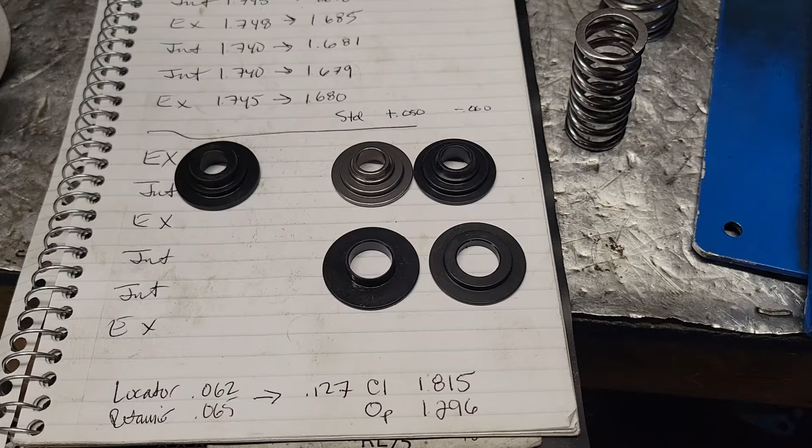Alright, so here we are playing with some valve springs, and let me give you some more tech info here.

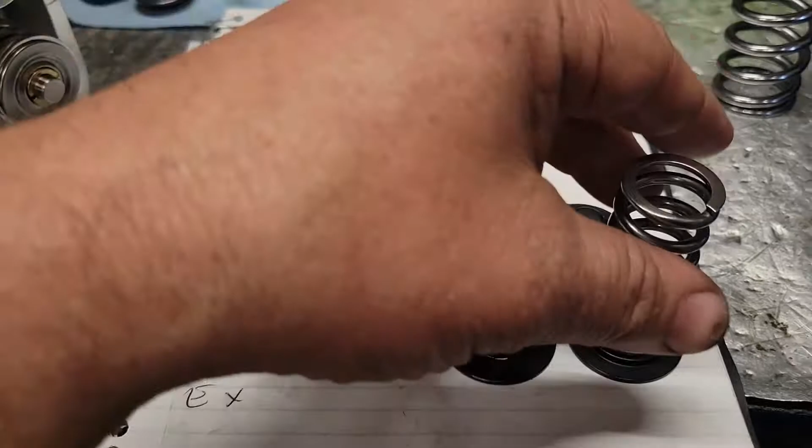See, we have the locators. That's a standard locator with no step. Here's a step locator. When you have dual springs, you get a little bit more pressure out of there.

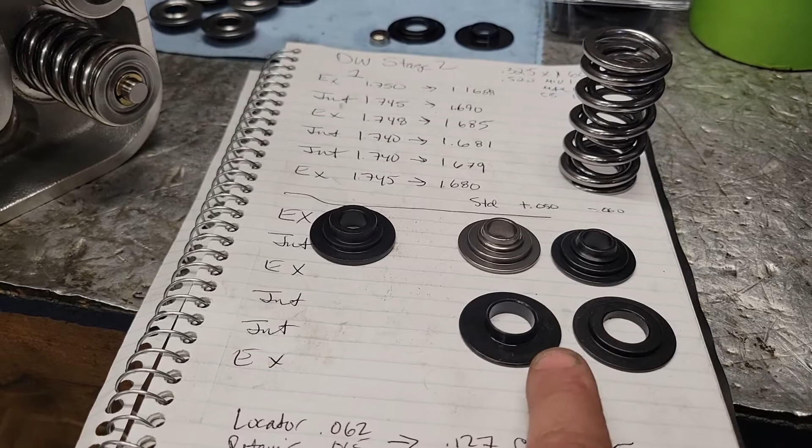And then all of our retainers have a step. Okay, so when you're measuring your valve spring, you actually want to put the entire spring on the locator and the retainer, and then stick it in your spring compressor. So what you want to do is measure the thickness of the outermost edge, which is 62, and the retainer is 65, and the locator is 62. That's the combination I have right here on this head.

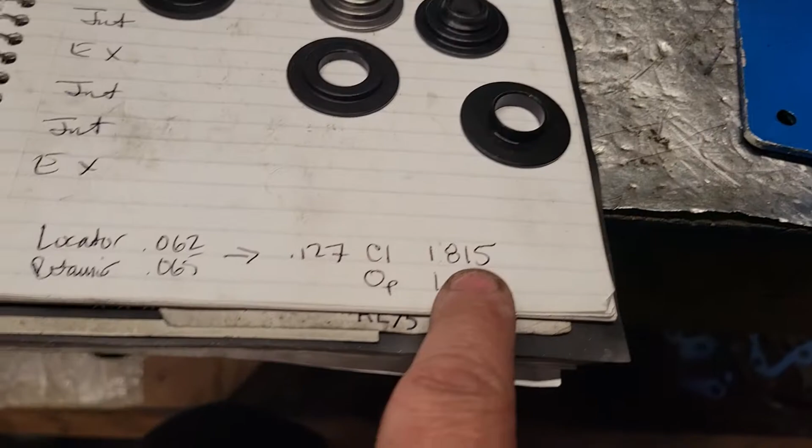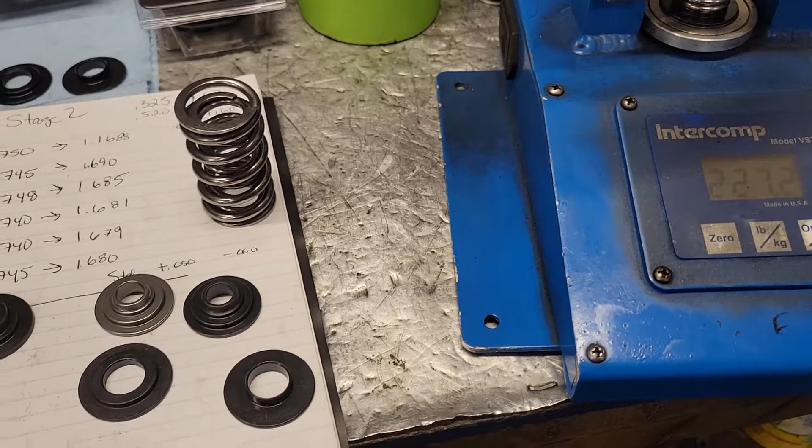And then you put them on the compressor and you do backwards math. You add 127 to your closed and your open, so it goes from 1688 to 1815, and then I'm just going to go max open, which is 1.169, add it to that, so that's 1.296. Check my math, hopefully I'm right. I'll check it again once I'm done doing the video.

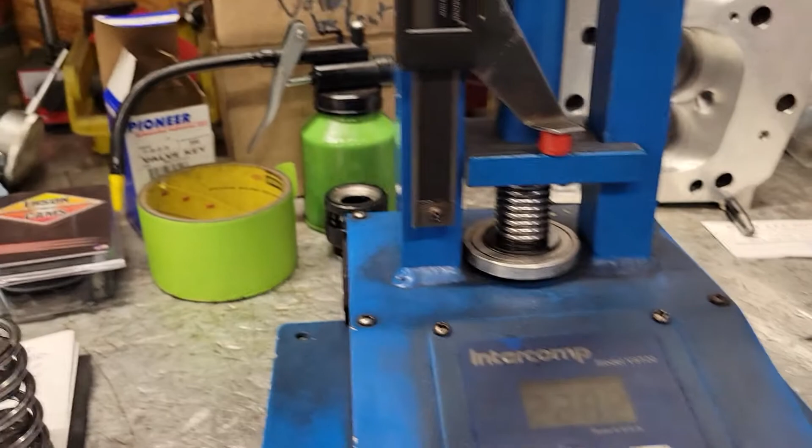And I ran into coil bind on the inner spring, and of course it's sleeping now, so let me wake it up. There it is, it's awake. Let's see where it binds.

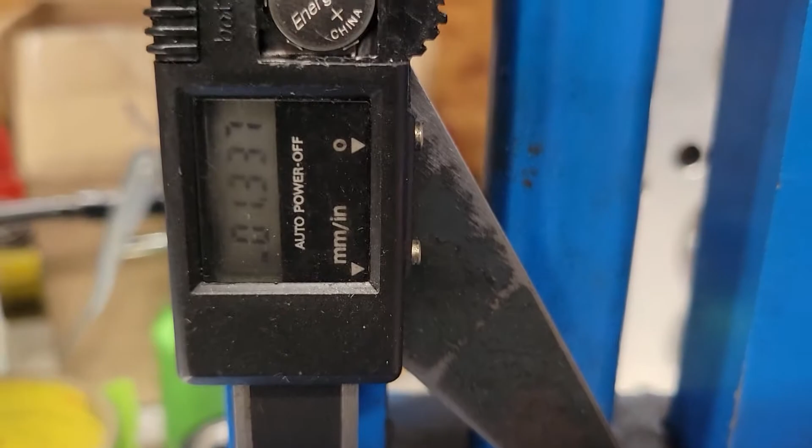It binds at 1377. I have to go to 1296, and you can see that's 150 pounds of pressure. So let me show you that it's in bind. That's in bind. That's it.

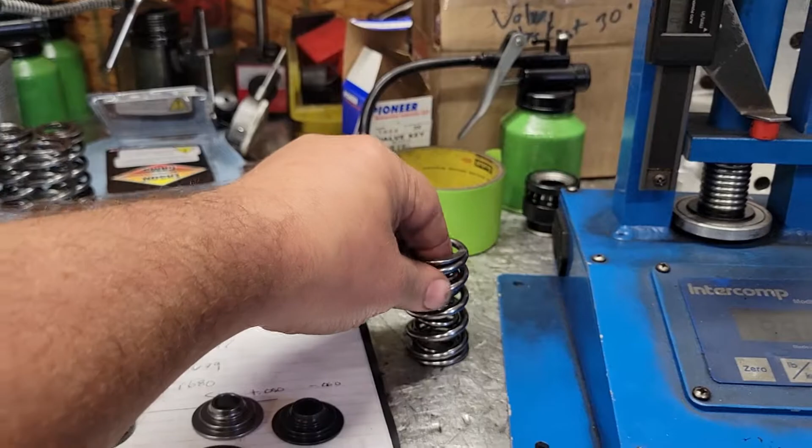So of course it should be installed before bind. So now this number's no good. So if I didn't account for this inner spring and I just played with the outer spring and measured it without the retainers on it, all these guys would be set up at coil bind on the inside spring.

It might not coil bind because you lose it in the rockers and you lose it in the push rod because there's deflection. But you can't build a performance engine on that. You mathematically have to have a safety net built in. How are we going to do that? We're going to change one of these components.

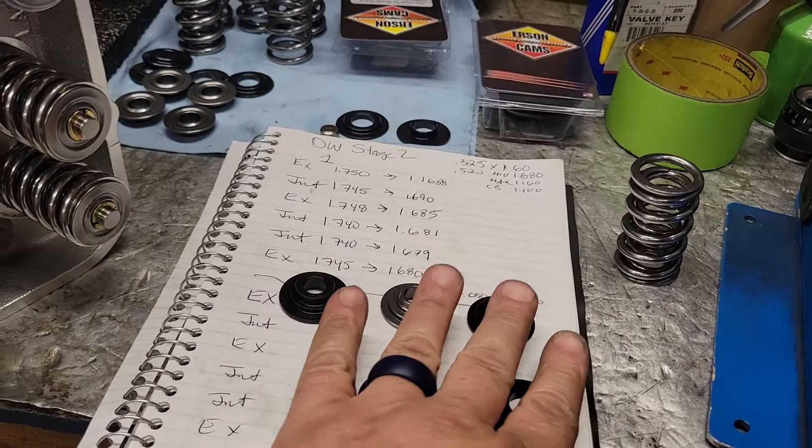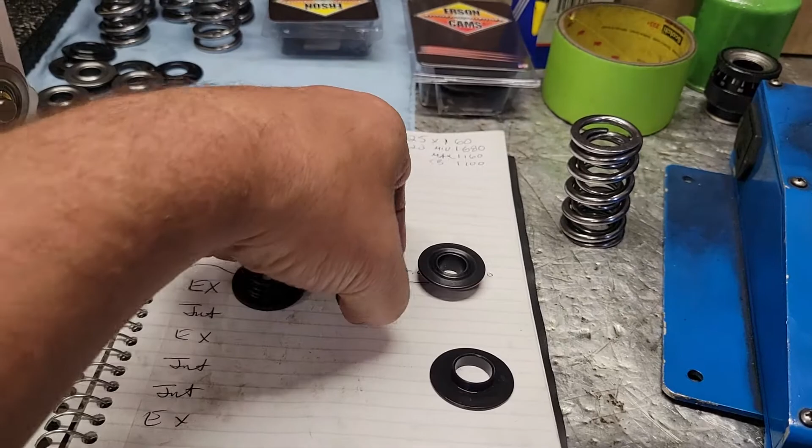So we're going to take this one out of the equation. It has a step, and we're going to use the one without the step. And then I can use this one, or this one, or this one. Well, these are black and one of those is silver. What's the difference? Well, these are steel and these are tool steel.

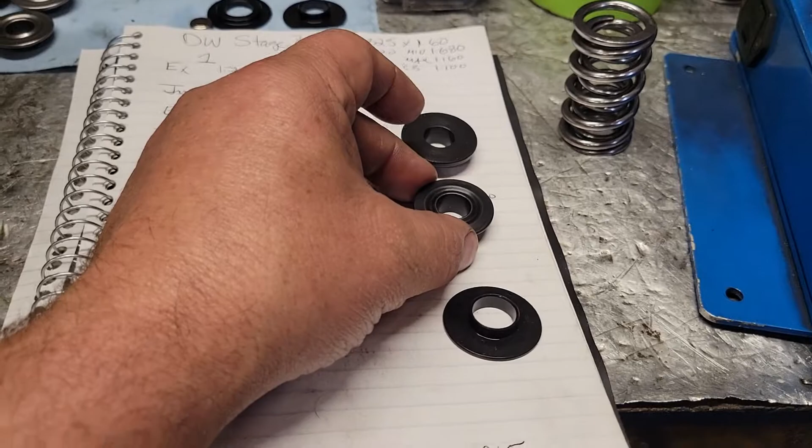So these are really light, and let's walk over to the scale and we'll see how light they are.

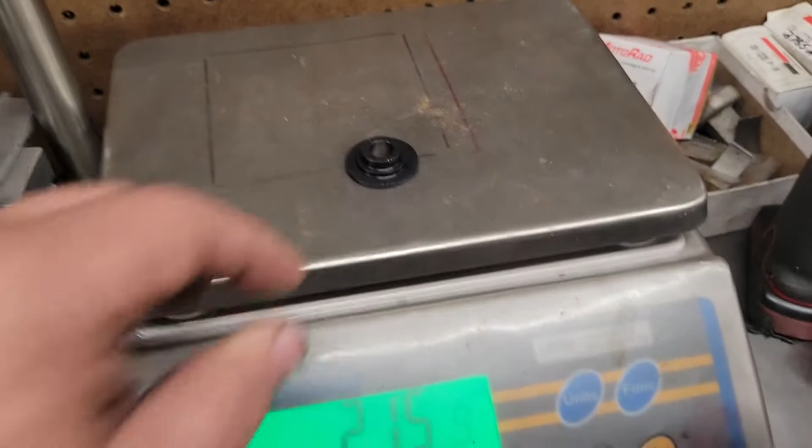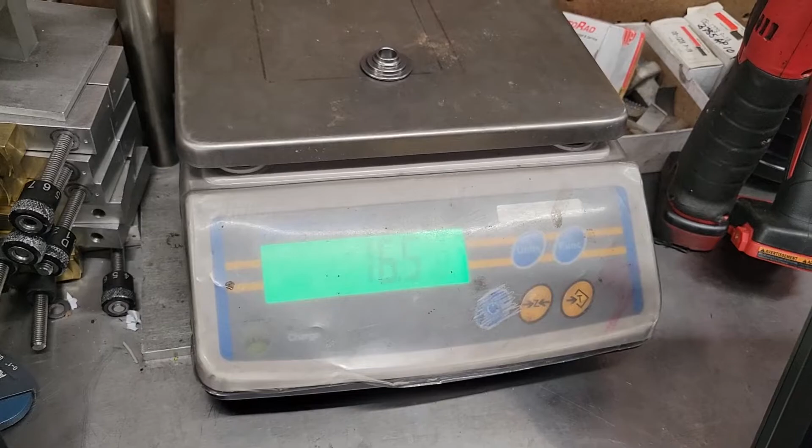Right, so this guy's 21.5 grams. He's slightly lighter, 17.5 grams. And 16.5 grams. So 16.5 grams versus 17.5 grams versus 21.5 grams. This is a heavy guy. Don't want to use that guy.

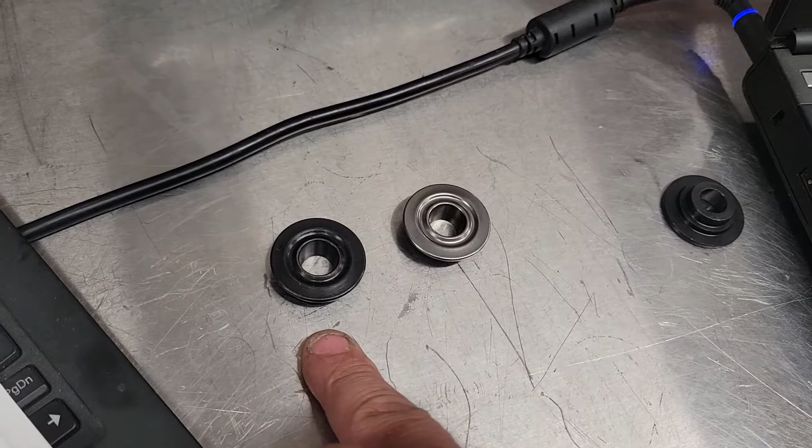These guys are pretty expensive. These guys are more affordable. You're going to chase a gram. But we're building a performance engine. So yeah, we're going to chase a gram.

So those are the details you got to pay attention to. If you miss them, this thing's not going to want to rev, and or it's going to break parts.

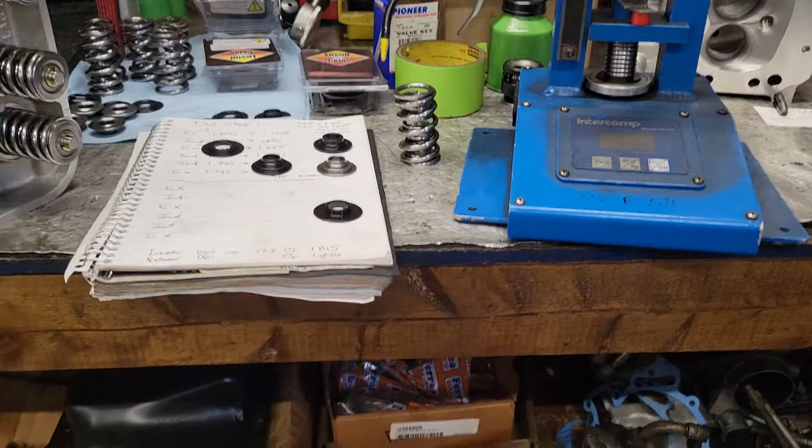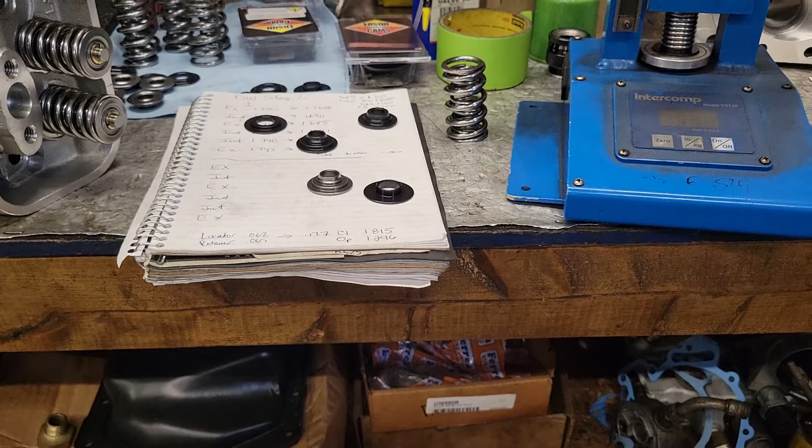So we're going to go with these. We're going to lose a little bit of spring pressure, but we're going to have our valve train be as light as possible. Our open pressures are going to be just a skosh under 200. Our closed pressures are going to be a skosh under 200, and our open pressures are going to be right around 400. And this motor should rev to the moon, no problem at all.

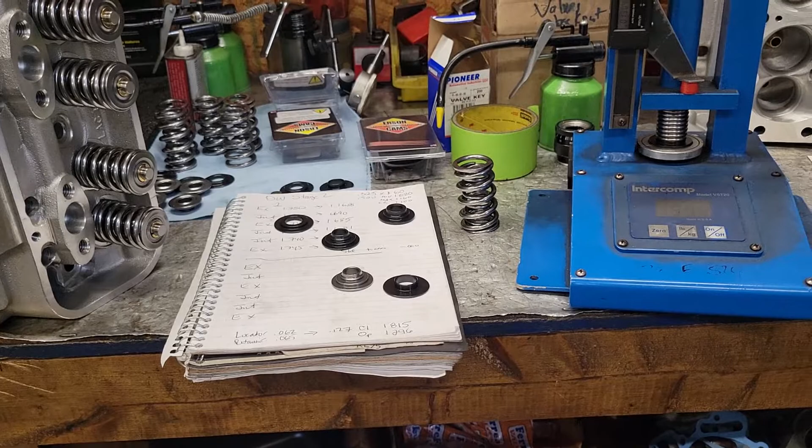So hopefully that helps somebody, because ask me how I found that out the hard way. So that's the inner spring, and you can see how I set it up.

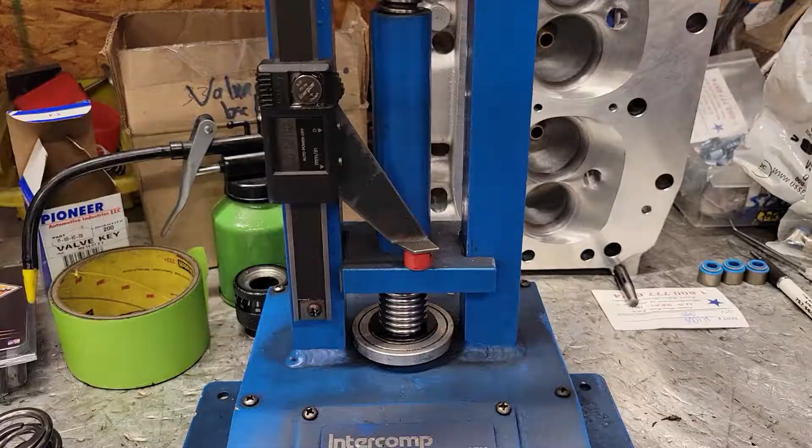Like so. So now it's going to be like so. I'll put that back in the compressor and we'll see where the coil bind moves to. Moves to 120. So that gives me 96 thousandths. I'm good. I'll run that.